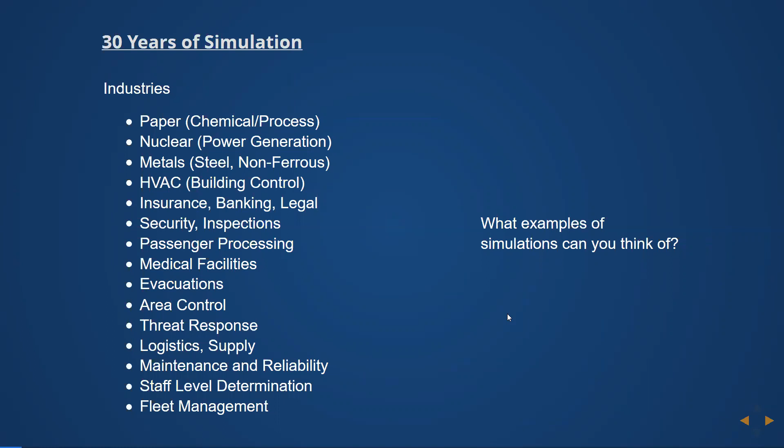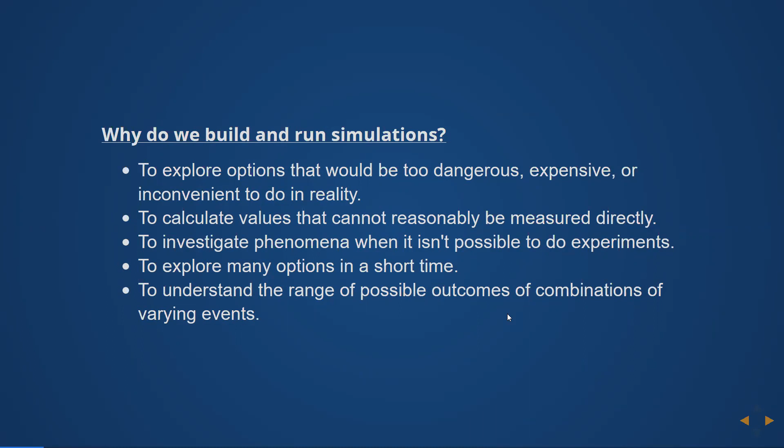Why do we do this? To explore options that would be too dangerous, expensive, or inconvenient to do. There are some things you cannot measure, but you can calculate them using simulation, and use the calculated values in feedback and control systems. When you can't do experiments, like on the formation of the universe, you can't run that five times before lunch and three times after. You have to play with it in a computer to investigate a lot of options and the range of different outcomes when the internal events are variable.

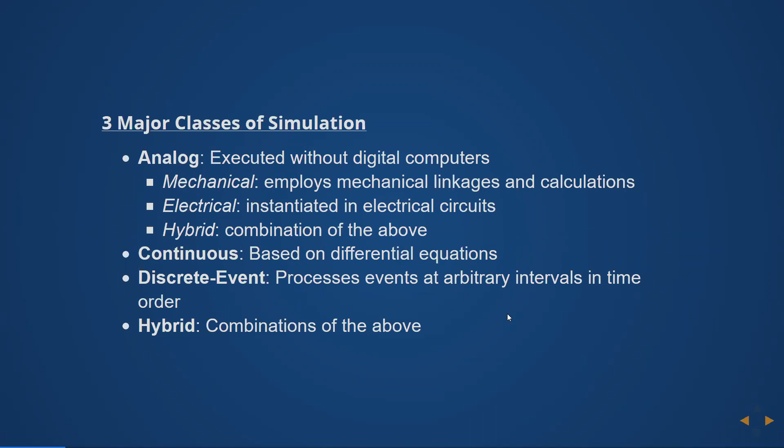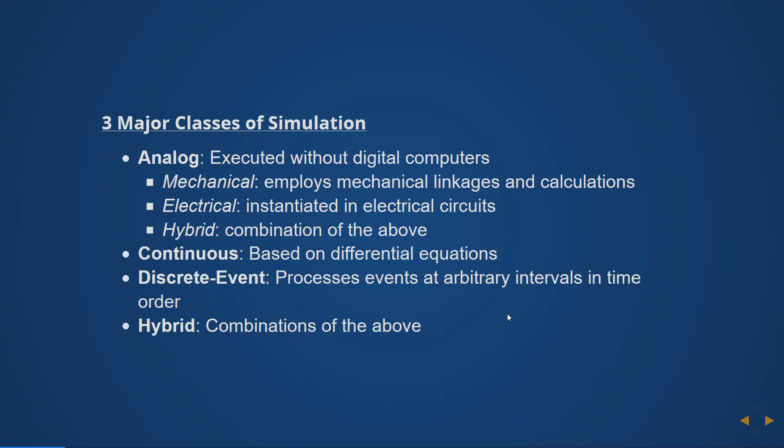There are three major kinds of simulation. There are analog simulations, done with electrical, mechanical, or fluid components, or mixes of those. There are continuous simulations, usually models of physical happenings based on differential equations. And the kind most germane to business analysts are discrete event simulations, which are akin to the kind of operations you investigate and automate in the course of doing BA work. Obviously you can have hybrids of all these, and I've done those many times.

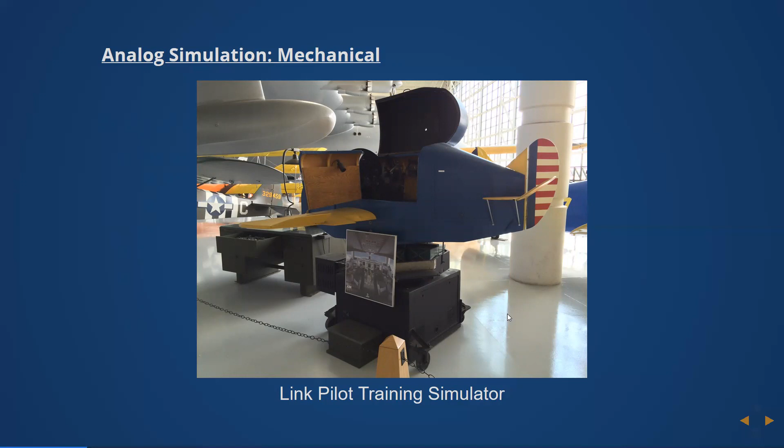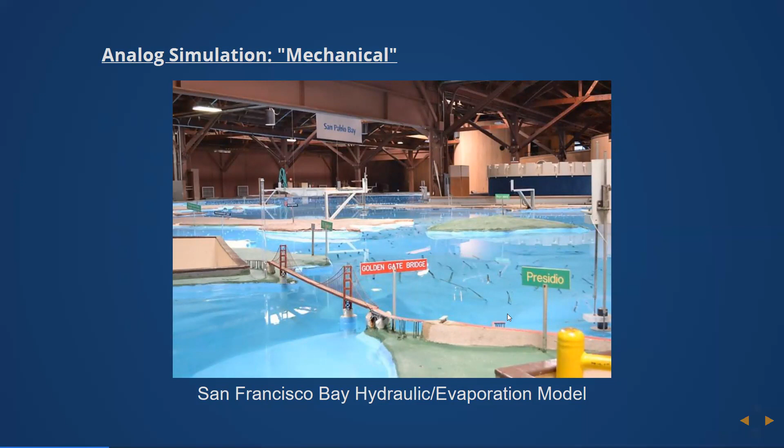An example of a mechanical simulator is these old Link flight simulator trainers they used to make. That one's at the Evergreen Air Museum in Portland, sitting under the wing of the Spruce Goose. That is the San Francisco Bay model in Sausalito, a really cool place. The water area itself is about an acre in size. So that's totally an analog mechanical simulation of a kind.

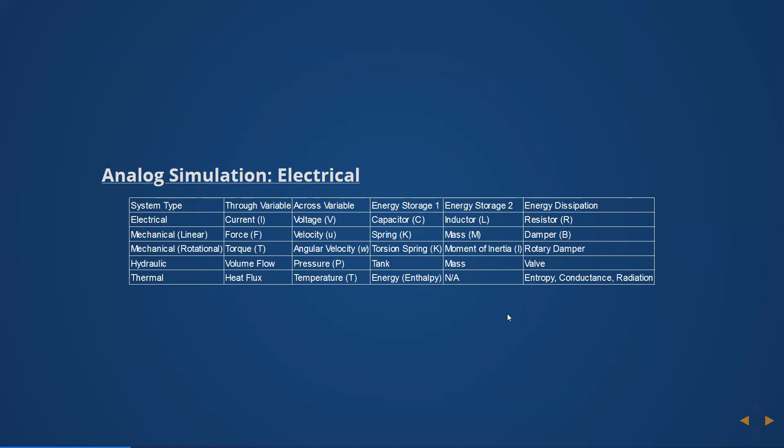If you want to do electrical simulations, you can take advantage of the fact that there are many physical processes or realms described by similar equations. So if you build an electrical circuit with the same characteristics that mimics the physical system in question, you can get a pretty accurate simulation of those effects. That's a more formal way of communicating the same thing with the actual variables, and again, you can have hybrids.

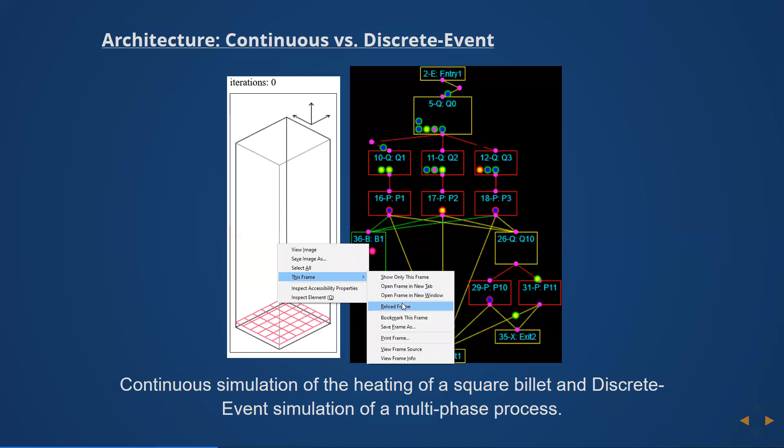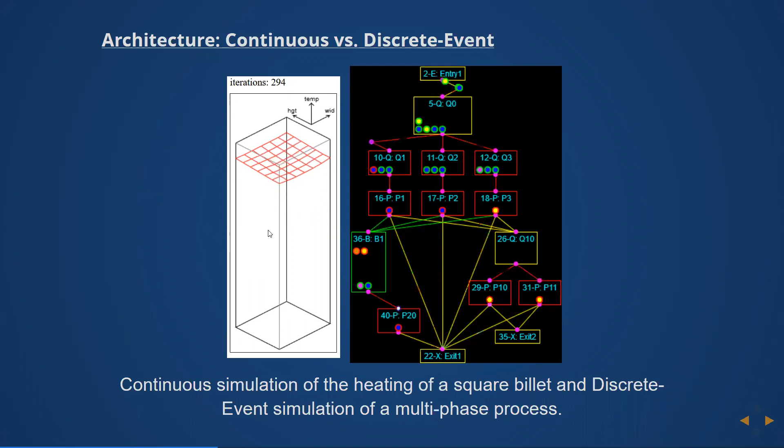So that's two major kinds of simulations. One is a continuous simulation, like the internal heating of a block of steel across a cross section. The other is the flow through of entities through a multi-phase process with queues.

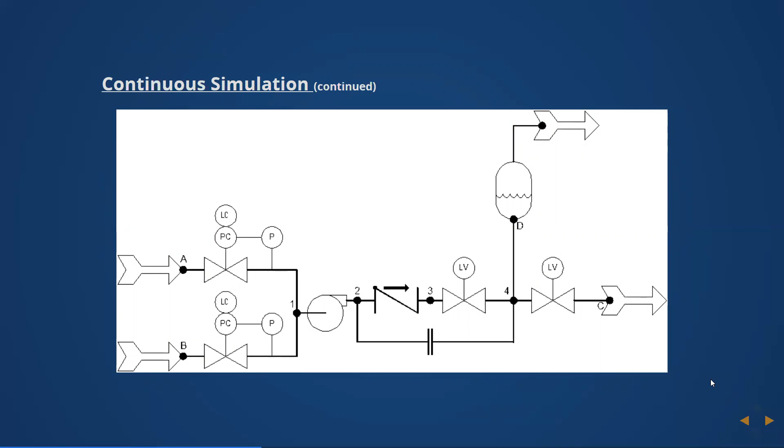So you can think about a fluid system or any kind of physical system, and this isn't germane to BA specifically, but it talks about all the different things you need to know to build simulations. We can describe different characteristics of the system in a series of differential equations, and then solve them simultaneously using a matrix.

Just to show you an interesting phenomenon: you'll notice that this matrix, since everything is connected to everything else and to outside systems, is symmetric across this diagonal, shown in blue. So the light red squares on the opposite of each blue one are the same. Same goes for the foam green ones, and the same for the purple ones.

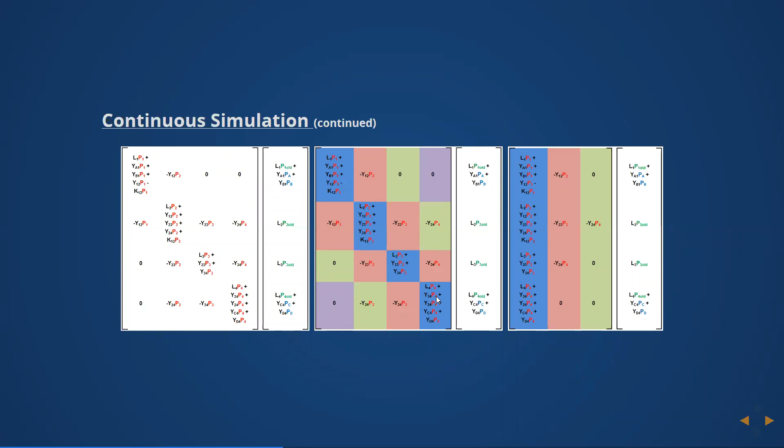So you can rearrange those and solve that matrix by only looking at half of it, or a little more than half. And that means you can do fewer mathematical operations to grind through this thing. If you're using a really small matrix, it's not that big a deal. But if you're using a much larger one, for example, to solve a system of these equations...

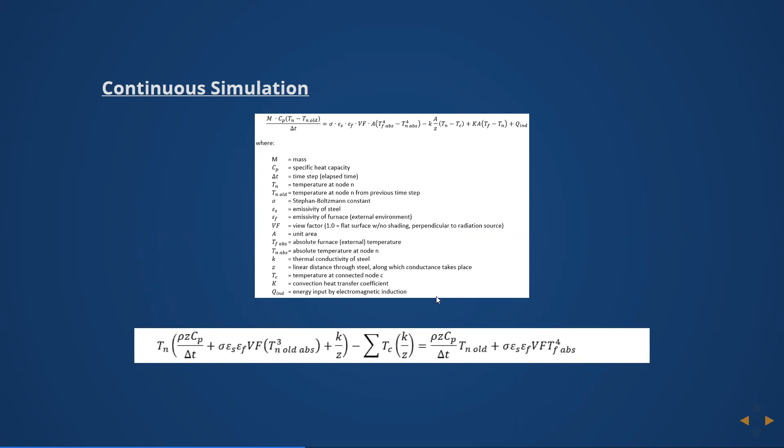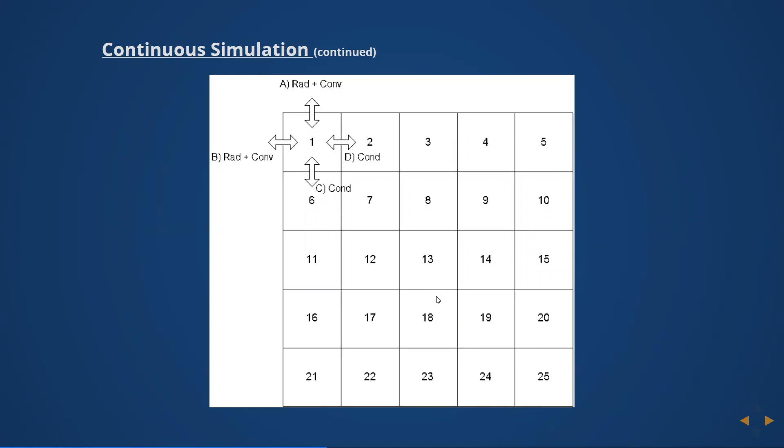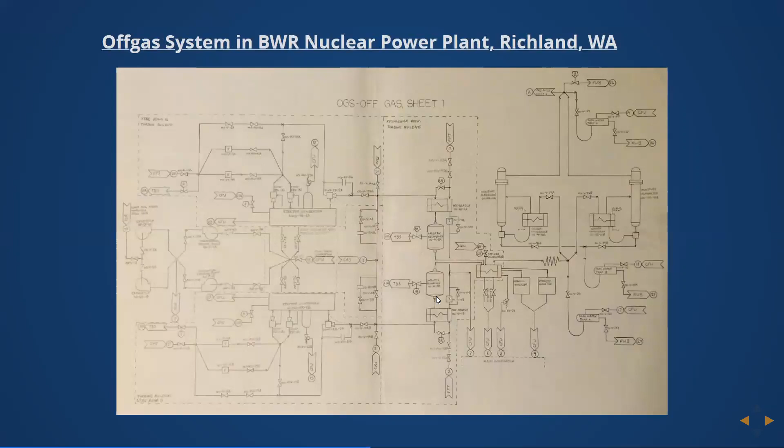Here's the same block of steel I showed you earlier in that nice graph that was animating its way upward. The matrices get a lot bigger. They're symmetric and they're banded, and you save a lot more time rearranging them for greater efficiency. So if you have a more complicated system, these things can be connected arbitrarily to anything else, but you can rearrange the order in which you define or number the nodes or any of the elements so you get the tightest possible matrix.

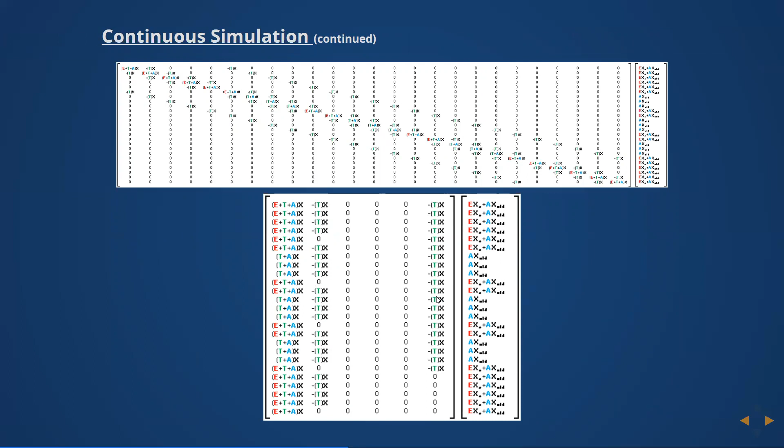If we want to talk about discrete event simulation, they do things in time order. They process one event at a time and also test for wake conditions. Unlike continuous simulations, which tend to run at fixed time steps, so they'll grind through 1 second at a time, or 1 minute, or 1 hour, or 100 years. It doesn't really matter. But discrete event simulations, you can have 50 things happen in a minute and then nothing for 8 hours. So during that 8 hour period, you don't have to grind through and do nothing in 1 minute intervals. You can just skip it.

Also, you process events kind of qualitatively. This shows how some events are happening along a timeline, and this shows the nature of the event. So if we follow the blue entity coming into a queue, we see the change of state of the queue. So the blue enters, then we pull a green one from the queue that's gone now. The queue's obviously moving left from right. We then pull from the queue so that first green one's gone, then enter another item in the queue. Then we pull the blue one from the queue. And that's a big part of what discrete event simulations are used for.

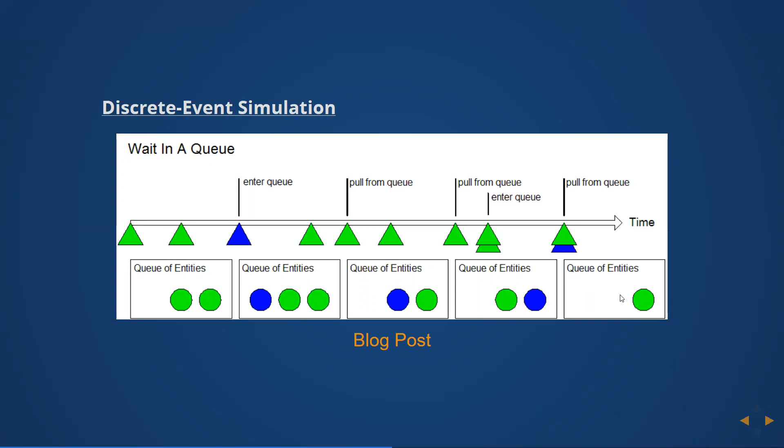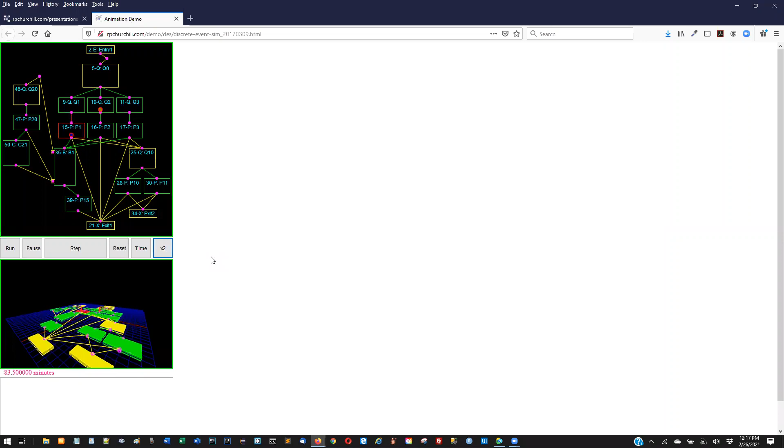So I'll show you an example of a running simulation. This is written in JavaScript. It can be written in any language. I've written full-blown simulations and tools to generate simulations in probably 6 languages.

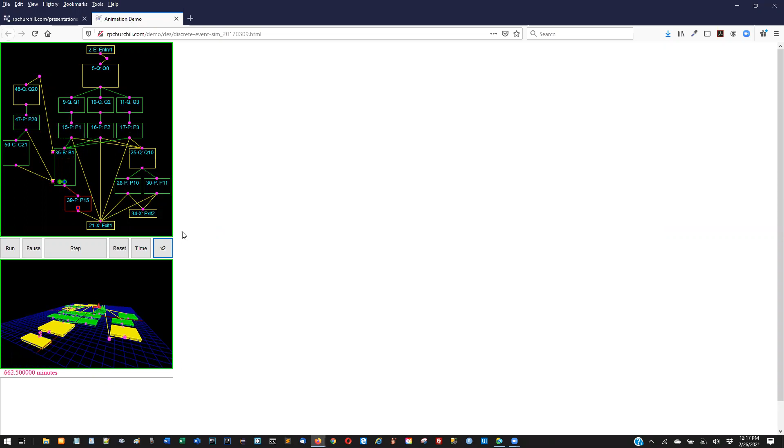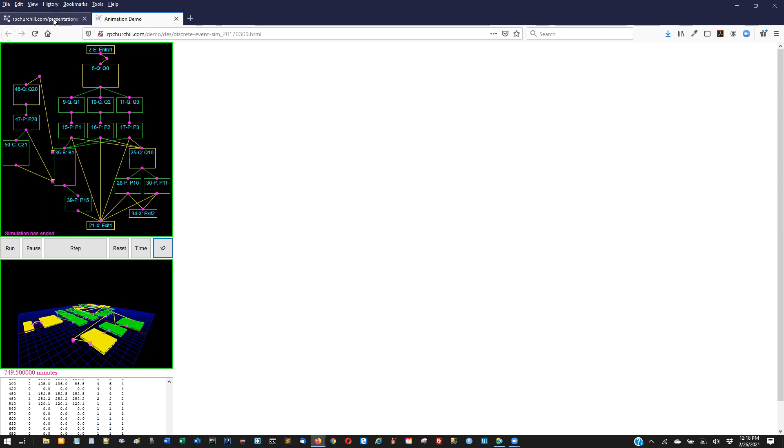And in these you can change process times. You can change the percentage of times that things go from one process to any one of many different destination processes, and different calculations and transformations can happen at any phase. And you can imagine this being any arbitrary business process in banking, document processing, computing, anything else.

So one of the architectural concerns is interactive versus fire and forget. So an interactive simulation, like you'll do for training or to adapt to changes in the environment, will take ongoing inputs and then change its behavior. A fire and forget, you just start it, it runs, and it finishes, and that's that.

There's an example of two different kinds of air defense missiles. An interactive one fires, and then a ground station has to continually track the aircraft and give commands to actually hit it. A fire and forget missile might work on infrared. It'll lock onto an aircraft and just chase it down on its own. So once you fire it, no ground station has to talk to it anymore. And there are pluses and minuses to doing it each way.

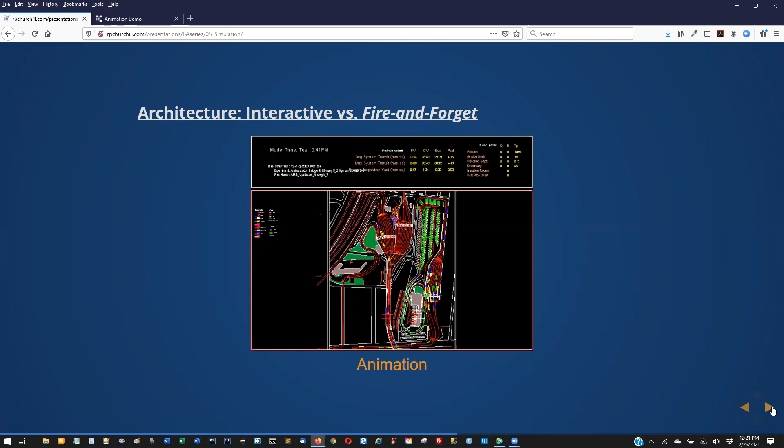But it looks great because they build a total mock-up of everything in the control room. Instead of hooking it to a real plant, they hook it to a simulation, and you pick what in the plant needs to be simulated, whether it is affected by or affects any controls or indicators on those panels.

Real time versus non-real time is another consideration. Real time obviously works at the same rate, 1-to-1 as real time. For a solar system simulation that might run 4.5 billion years, obviously that's non-real time. Almost always you want to run things much faster than real time if you can, but some models are much slower, like global climate models.

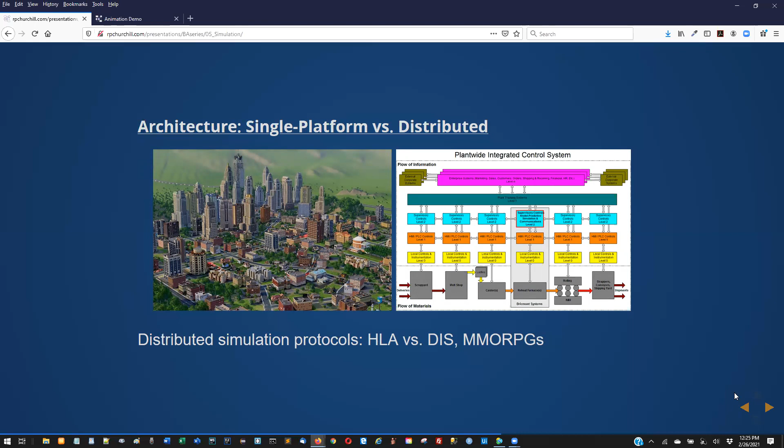Deterministic versus stochastic is another very important architectural consideration. Deterministic - and this is most continuous simulations - if you have a given set of inputs, you will always get the same output. It'll always produce a single point result.

By contrast, a stochastic simulation will generate different outputs every time you run it, as long as you give it different random number seeds. Because you need to be able to repeat experiments, you want to be able to get the same result every time if you run it with the same random number seeds, so you get the same random outcomes all the way through the model run.

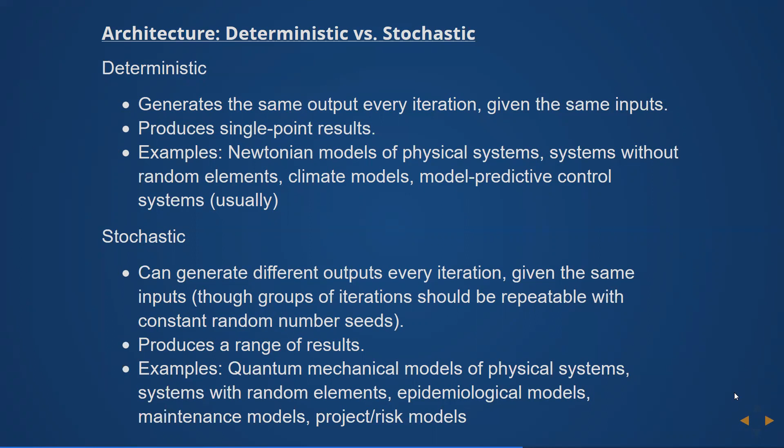There are examples of different kinds of systems. I find it interesting, especially with the epidemiological models that have been so in the news lately, that they report their outputs with a single value. And that is wrong - one of many things that are probably wrong with them.

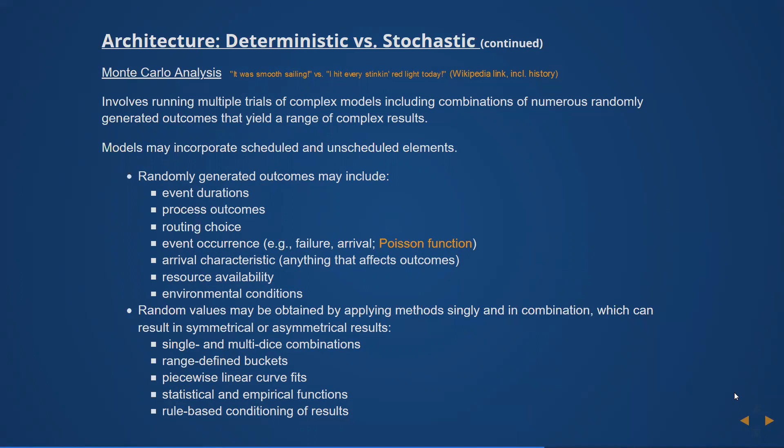Here's some information about Monte Carlo analysis. It's basically based on the famous casino in Europe. There are some links I put in here about Poisson functions, and there are a lot of write-ups on my website that go into this in more detail. The Wikipedia link talks about the very famous people who were involved in this early on, and it was an application that was just waiting for the advent of digital computers - some of the first programs ever written were to do this kind of work.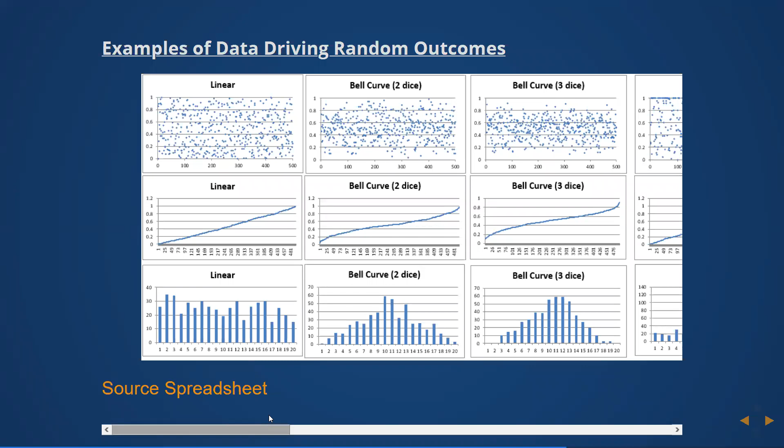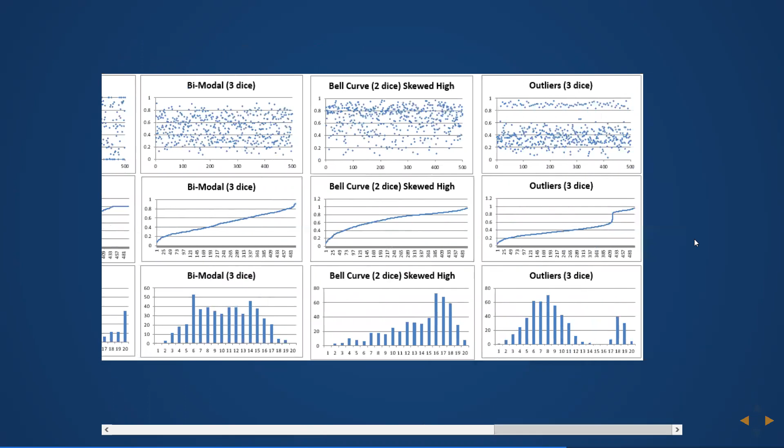If you want to look at random outputs for different kinds of processes, here's just a theoretical example of the kind of outputs you can get. They're all different shapes and distributions of outputs, and they all can be put together to build up a Monte Carlo or discrete event system.

Here's an example of running a model predictive control system for controlling a steel reheat furnace. On the right, you see an actual installation on model in Korea - it's two 800-foot long tunnel furnaces with long sections that swivel so you can transfer steel slabs up to 150 feet long from one to the other. The reason they did that was because there are two thin strip casters and only one rolling mill.

On the left, here's a PC simulation I did. The lower depiction shows the temperature as it is right now. The upper depiction shows the outcome - the discharge temperature of every spot on the slab if you don't do anything different. The point of this is that you cannot measure, like I talked about before, what's going on inside the piece of steel, but you can simulate it. Then you can change both the travel speed or residence time of the steel in the furnace, or you can change the temperatures in different sections of the furnace, to get the outcomes you want.

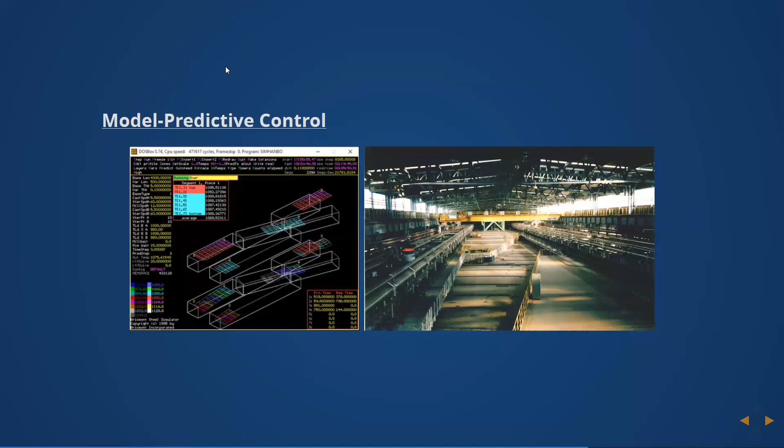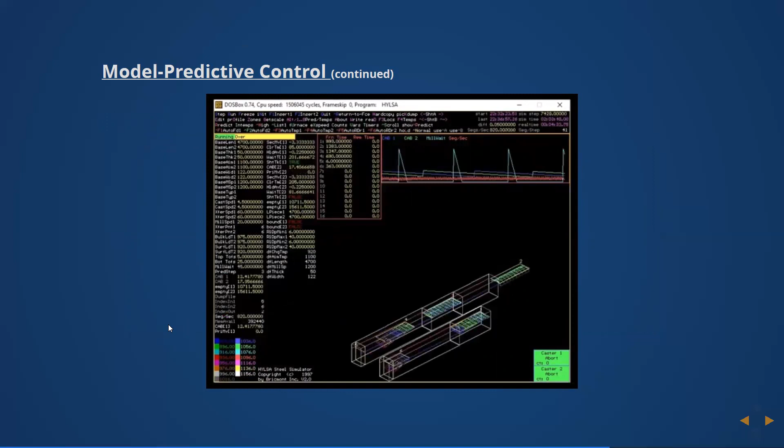Here's an animation of the same thing, without the prediction in this case. This is a shuttle furnace and not a swiveling furnace. But this is what I was doing with PCs in the mid to late 90s.

So other contexts for simulation - whenever you're automating a process or building a computer process, in some ways that is like simulating activities that either can be or used to be done by humans. You're automating a lot of things. You can think about business processes as human in the loop simulation, so you're using all these same skills.

Now, if you remember previous weeks, I've gone through the whole process: intended use, conceptual model, requirements, design, implementation, and test and acceptance. So it's the same process for doing both, if you're automating the interaction of a human with a computer's user interface.

That's just robotic process automation. Nowadays we use tools like UiPath and Selenium to accomplish that. We do it for automation, we do it for user acceptance testing, but none of it's new. I did it back in the 90s using FileNet, and I'm sure it goes back much farther than that.

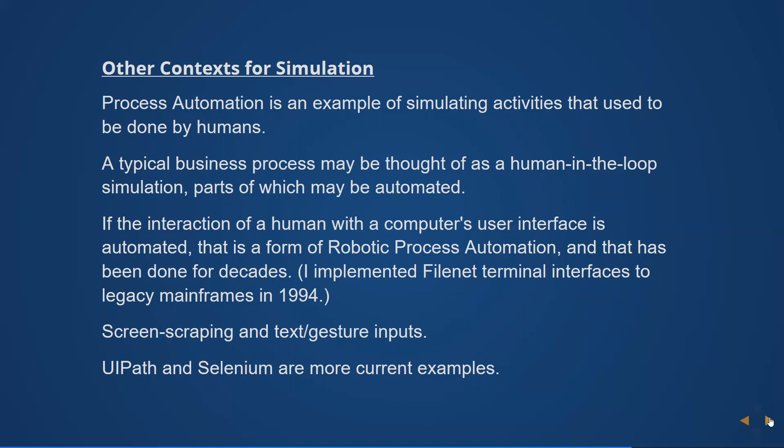So we're getting near the end. What do we need for simulation? We need the ability to do lots of calculations. We sometimes need a lot of memory to store a lot of information and output. We need accurate and authoritative and obtainable input data.

I can talk about data quite a lot - Richard certainly did in the 20 presentations he gave before I started. You need to have valid behavioral data, that is accurate descriptions of what happened and what transformations and calculations are done. And you need to have the right level of detail, and you need to generate output you can do something with.

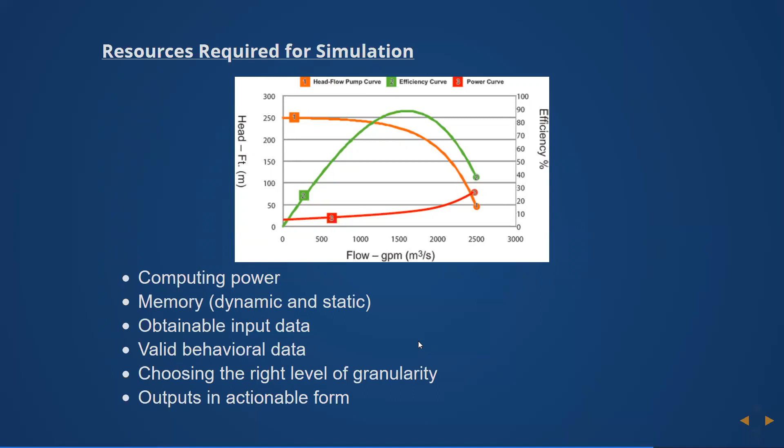If we want to change things, so we need more computing resources, what could we do? And this talks about the limits of simulation. So if we think about a global climate model, think about the resources you need just for a moment.

The surface of the earth is 196,900,000 square miles. So if you want to have nodes that are a mile on a side, not to mention how many you might need vertically to simulate what's going on underground and in the water and in the various levels of the atmosphere, you need some multiple of 200 million nodes. That's a big honking computer and a lot of memory you need.

So every simulation will necessarily involve some shortcuts. You can also make the time steps as short as you want. I note the Courant limit there because an assumption in many simulations is perfect mixing of fluids. And if you make the nodes too small or the time steps too long, so that more stuff is going through the node than can be stored in the node, you ruin the conservation of mass and energy in the simulation and make it less accurate.

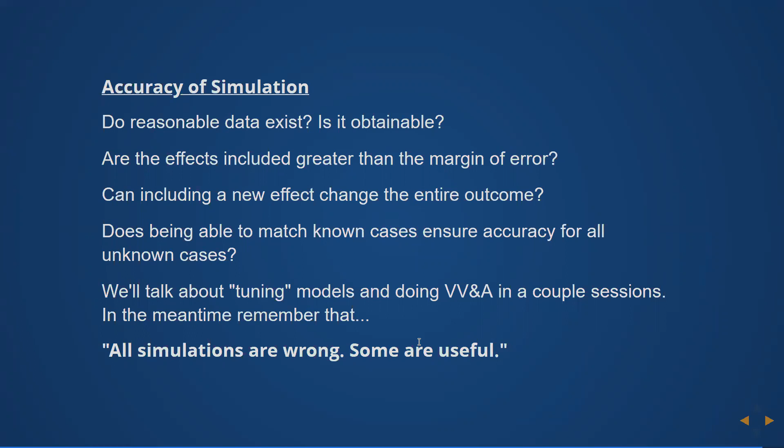But for now, I'll leave you with the idea that all simulations are wrong, but some are useful.